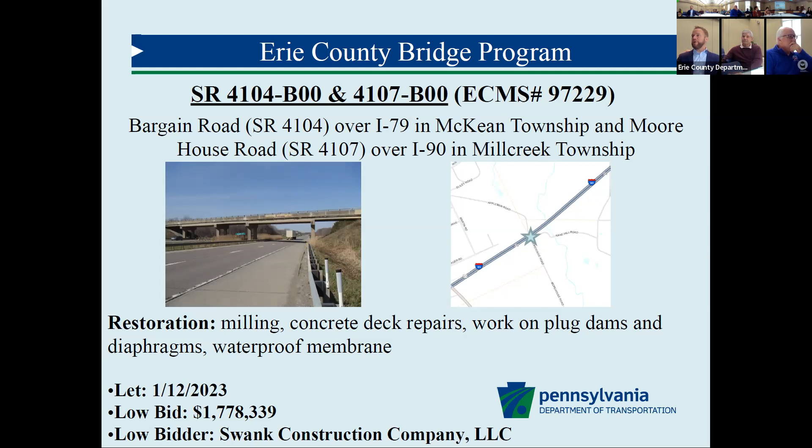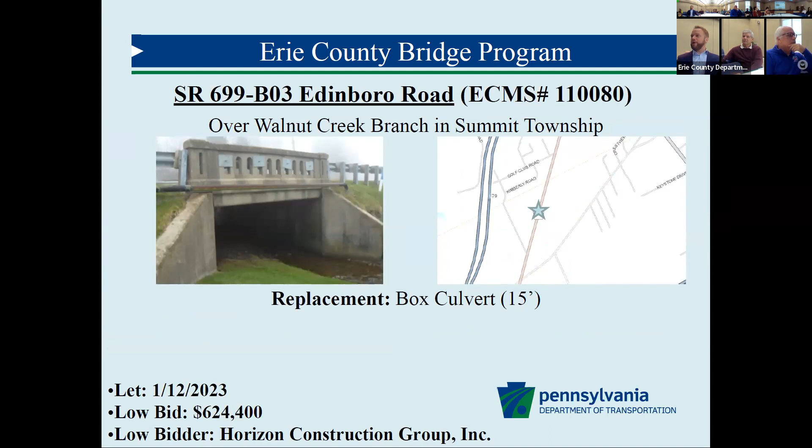This is another one on Edinboro Road, a much smaller bridge than the one over I-90, over Walnut Creek in Summit Township. It will be replaced with a 15-foot box culvert. If you're following online, you can see low bid prices and low bidder information at the bottom of the screen.

SR 90-M01 is a crack sealing project. We're always trying to draw a balance and figure out what and when are the best maintenance type projects to put out to contract. This year, we decided to do crack sealing on the interstates in the district that were due, and put them out as a contract. This isn't TIP funded—it's funded with county, PennDOT county maintenance budgets—but I wanted to show it to the group.

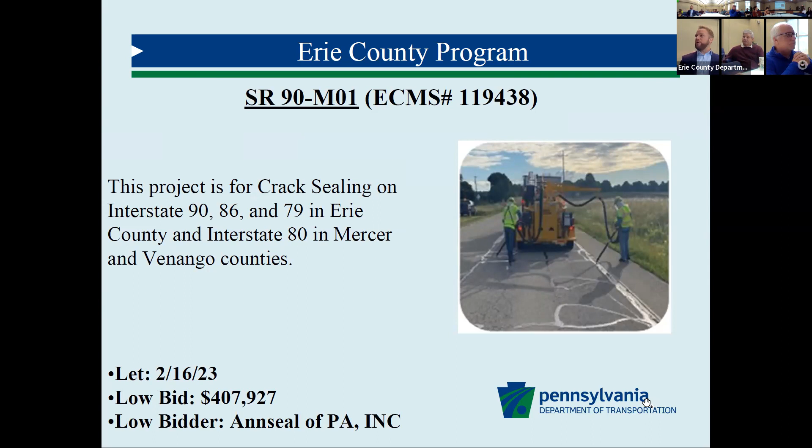ANTP means anticipated notice to proceed. I should have clarified that at the beginning, but if we open bids on March 30th for a project like this, anticipated notice to proceed would be mid-May. So this is a pretty short paving project that would definitely be done in this construction season.

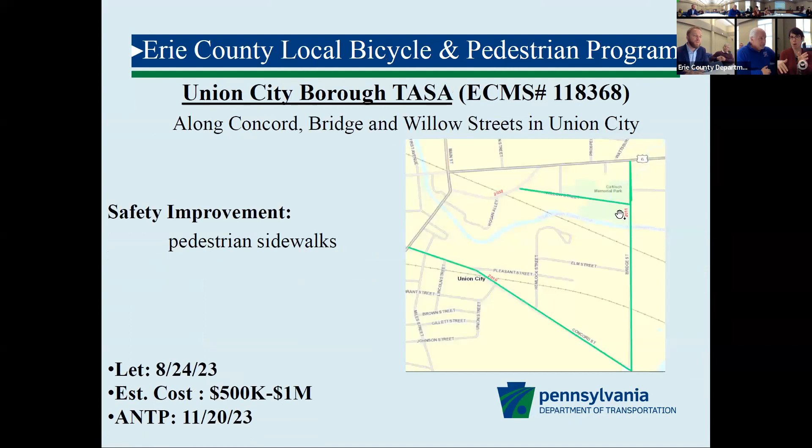Was that not part of the paving in Girard? No, I think the scope was expanded because the Girard Hotel was demolished. I believe they were widening that intersection. Do you know if that was incorporated into the paving project? I don't know, I'll check.

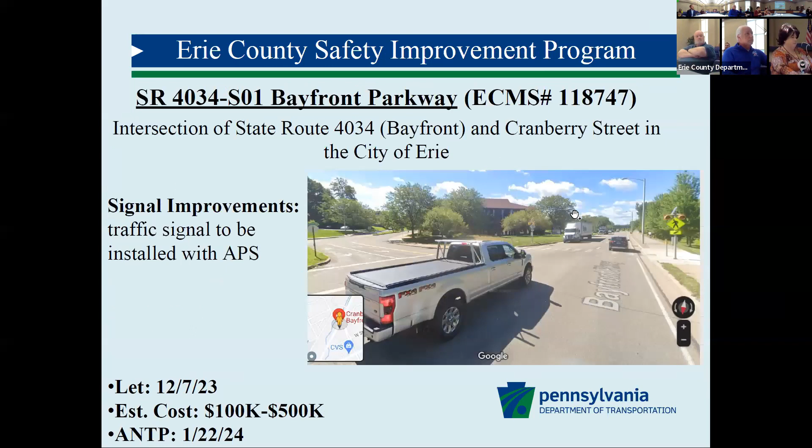So that's the hope, is there a local project or something? That was approved. It just hasn't happened so far. We'll follow up. Do you know any more about that? It should be part of the project, as far as I know. It was decided, but I'll follow up with you. Thanks, good question.

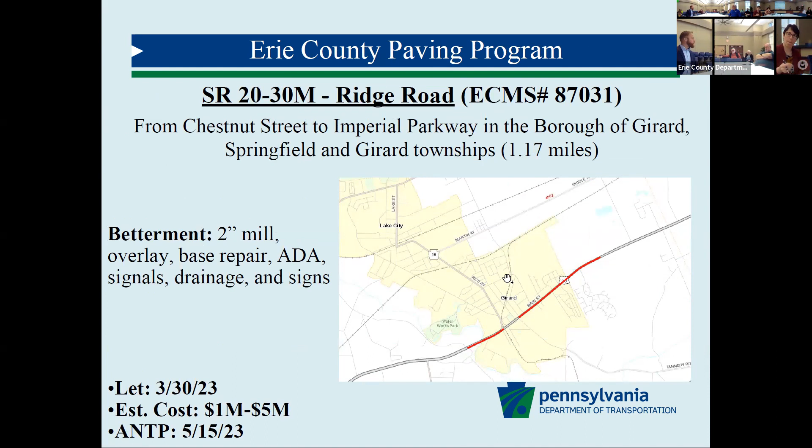I don't know, you mean when it's gonna be fixed? You said it was just paved in the last few years. Probably 4 or 5 years. They never put the risers in right. Cars going through there hit it like a pothole all the time.

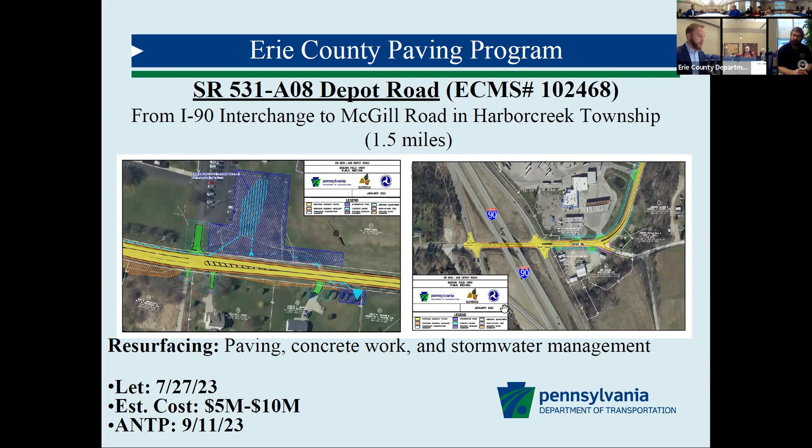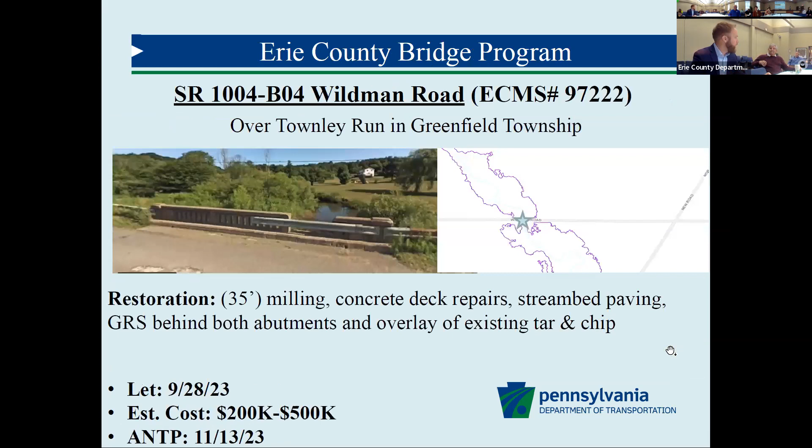That's always been a struggle, because it involves a level of partnership with the municipality, whoever owns the manholes. We see that often, it's a pet peeve of mine too, just like everybody else who drives over them. You get brand new pavement but you're still hitting these big dips. At the district we're working on an internal project to find a way to make that work more smoothly, because often we'll run into old manholes crumbling that aren't ours.

So we're not gonna get into that with the paving project. Often we need partnership with the municipality, and sometimes they're able to coordinate it and sometimes they aren't, but we're doing everything we can to fix that in general. I just didn't know if there was a timeline on when they were gonna do it.

Since we don't own them, if that project was done 4 or 5 years ago, unfortunately my answer would be that's a better question for the township, the municipality in question, as to when they'd adjust the risers. So when are they gonna be paved? You guys have any idea when they're gonna be paved? I don't know off the top of my head, but we can look it up. If it was just done in the last 4 years, we shoot for roughly a 12-year cycle.

Martin Road and 99, I'm sure you're gonna coordinate that, since our flow into Millcreek is gonna be part of it and 99 is closed, they can't be closed at the same time. In general we've got that covered, but I'll check on that one specifically. We've got a map of every project with detours and closures to make sure we're not causing conflicts between two projects, but I'll check on that one.

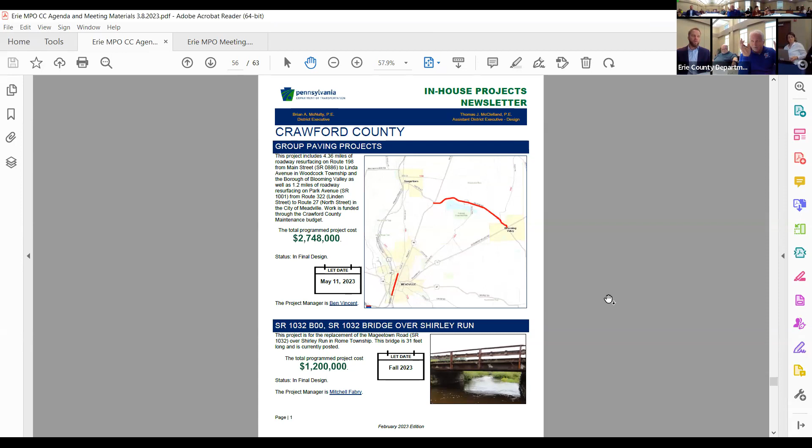Do you know if they're going to do a press release on the bridge over I-90 on Edinboro Road, for the closure? We announced it at our public meeting, but we're trying to make sure it gets blasted out to everybody. Our standard is to put a sign up, giving 2 weeks notice to the drivers, and also to do a press release. That means you're actually taking out that road? No, we were just talking about the Edinboro Road Bridge project.

Okay, thank you. Going over to G, federal updates.

Ronique's there, is Ron on the line? I had heard that she wasn't going to be, so, all right, nothing on the federal updates. Okay, thank you.

PennDOT central office updates. This is Brandon Leach again, I'll go ahead and cover these. There's just a couple things to touch on, some of this might be repetitive depending on if you've received email blasts from other sources. But I first wanted to touch on the STC and PennDOT announcing the start of the 2025 TYP public outreach campaign.

As you may have heard, the State Transportation Commission and PennDOT announced the public outreach campaign for the 12-year program, or TYP as we refer to it. The 2023 Transportation Performance Report was approved during the February 22nd STC meeting, and this report contains information about how Pennsylvania's transportation system performed over the last 2 years. I have some links for these updates, I'll share with Emily and she can disseminate to the group after the meeting.

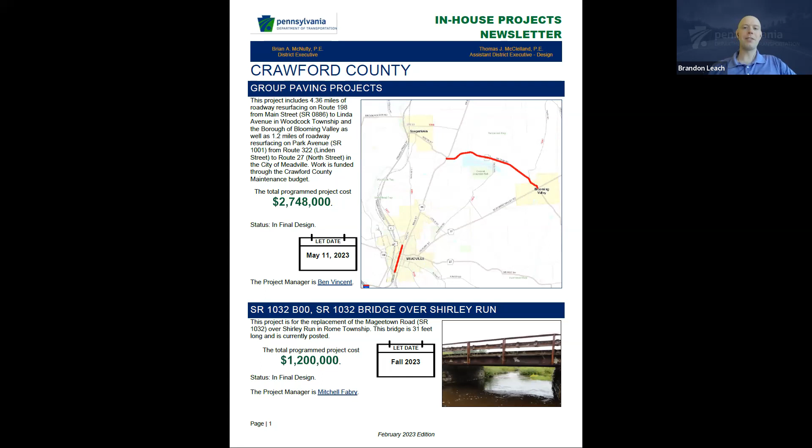The last thing I wanted to cover is in regards to my supervisor, Kevin McCullough, who will be retiring at the end of this month. I just wanted to put that out there. Since this will be his last coordinating committee meeting with Erie County, if he's still on the line and would like to say a few words, I'd open the floor to him. So it's all yours, Kevin.

Thanks, Brandon. Yep, I'm here. Hopefully everybody can hear me. I just wanted to thank Brandon for the send off. I've been very blessed to work with the great people out in Western PA. I was originally from Sharon, PA, so I'm very familiar with Erie County growing up out that way. I've worked with the folks in Erie County for a number of years in Brandon's capacity and also in my current capacity, 20 plus years, so it goes way back, probably before many of you are members of the committee. I just like to express my thanks, you're a great group to work with.

Very fortunate to have Brian McNulty and his leadership out there in District 1 delivering projects. You guys are very fortunate to have such a good team out there, believe me when I tell you that. It's very easy to work with his staff and work with Brian himself. I look at all those projects being delivered, and that's just fantastic news. It's really good to see a lot of this stuff getting done. Congratulations on that.

And all the good staff people I've worked with over the years with the coordinating committee and the county itself, I couldn't ask for better people to work with. With COVID and everything, I haven't been to a lot of meetings lately, which is really disappointing for me because I always enjoyed my trips up to Erie. So anyway, thanks everyone, I wish you the best of luck moving forward. Really appreciate all the good work that the coordinating committee and the technical committee does moving projects forward. Thanks again, and good luck to everyone in your future endeavors. Thanks, Kevin, hope you enjoy your retirement. Thank you very much.